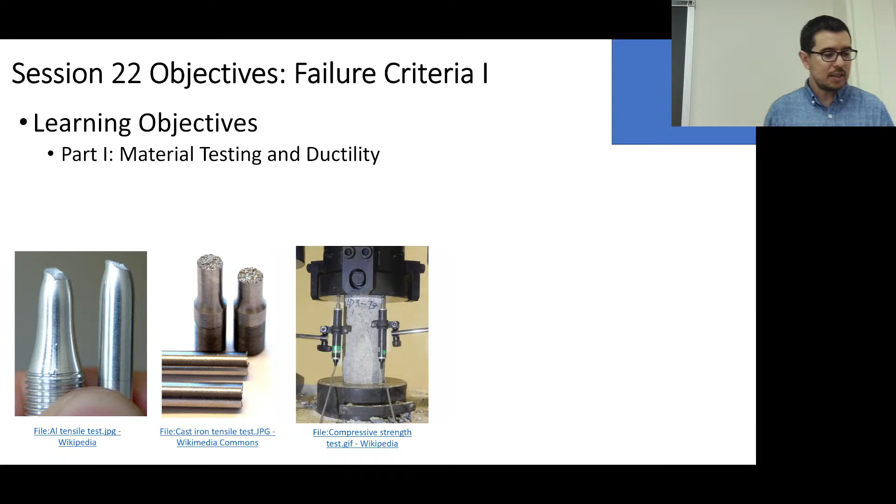So we're going to discuss material testing a little bit and ductility, and then we're going to talk about our first criterion, maximum normal stress for brittle materials, and then we'll talk about maximum shear stress for ductile materials.

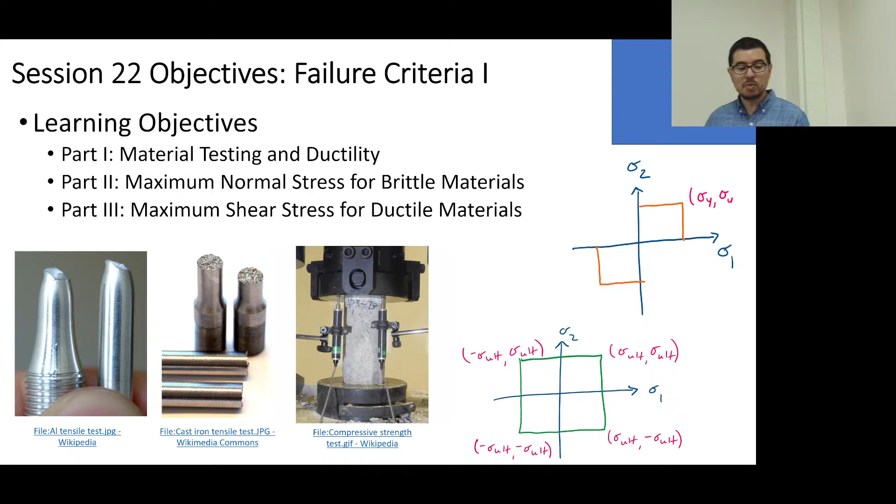In our case, I didn't really tell you how some of the samples are made. Maybe you care, maybe you don't, but we have wonderful design specialists in the department, and they have a die that they've made, and they can take sheets of aluminum and punch out those samples - that's how the aluminum ones were made. And then we have the paper samples - you made your own paper samples yesterday, hopefully that was a little bit fun.

The ones you tested to get the tensile strength, those we cut on a laser cutter ourselves. But you can do it - we've done it in the maker spaces, and we have a laser engraver in our lab too. So that's how we've created those samples for testing.

Something like this kind of sample, right, that has been turned on a lathe, okay, and those are more expensive to produce than the samples we're producing for our purposes.

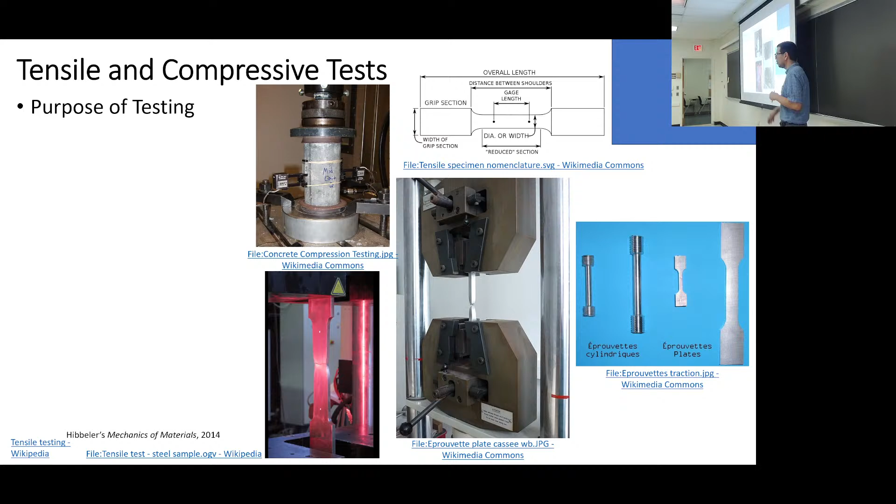The purpose of testing is to characterize the intrinsic properties of the material, so that we can take these intrinsic properties and then understand how they're going to affect the behavior in a structure.

Said this kind of prior, but to clarify, we have mechanical properties of structures. Mechanical properties of structures - those are the ones where we use the K, the stiffness, or the KT for the torsion. Those are mechanical properties. I have a spring constant, I have a spring rate.

Also, this is where the hot spot is. This is where the stress is going to be the highest. This is where the strain is going to be the highest. Those are going to be kind of mechanical properties.

Material properties are where I've digested everything down to an element, and I know what my elastic modulus is for this element. I know what its Poisson ratio is for this element, and I know how it's going to respond. Those are the material properties.

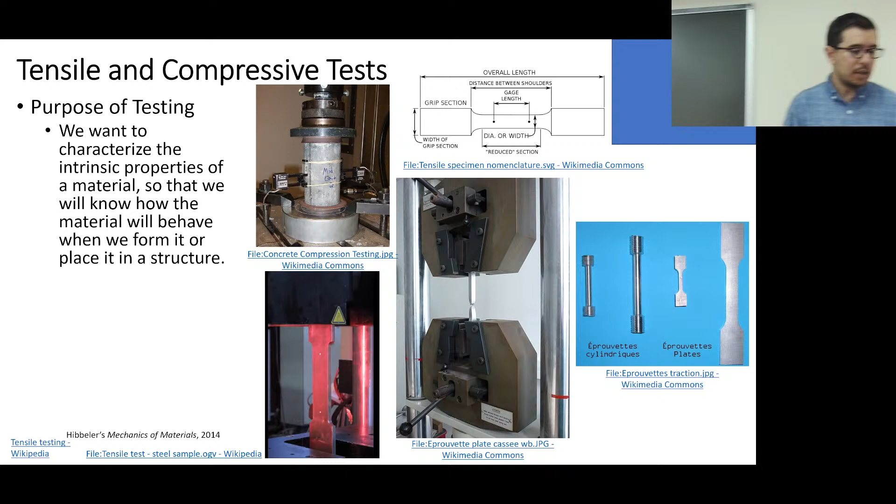So when someone talks about mechanical properties, typically they're talking about a structure. When they talk about material properties, they're saying this is the elastic modulus. Hopefully you don't mix them up, the mechanical versus material properties, but hopefully at this point this is kind of clear.

Tensile tests are not perfect. You saw it firsthand, right? You saw the noise. It's actually quite educational. You saw the noise in the sensor, like, is it 40 or is it 38? Is it 37 newtons? What's going on here?

Different material testers are going to be able to give you higher accuracy in the ranges you're interested in. If you're testing concrete pillars, you probably want fairly large load cells—physically large, handling kilonewtons of force. If you're testing biological samples, you're probably going to have smaller, higher precision load cells that can handle fractions of a newton. Or you get into atomic scale things, and you're talking piconewtons.

We kind of talked about this at the beginning of the class: you want to use the appropriate machine for the job at hand. You can get a machine that does very small, accurate readings, but that's really expensive—atomic level accuracy, like atomic force microscopy. You can get a material testing machine that does very high loads and is big, and that's also very expensive. So you want to find the machine that's appropriate for what you're doing.

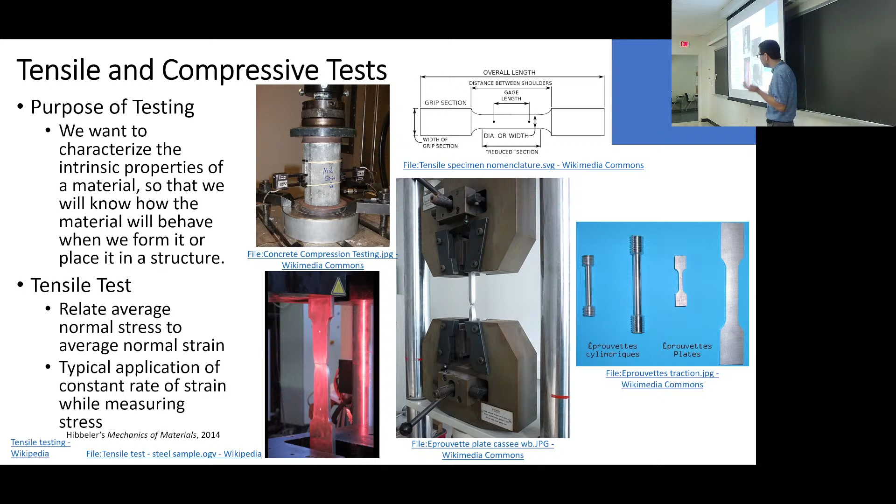The machines we have aren't tremendously expensive—you're hand cranking them. Thank you, Pasco. It's kind of fun to do a hand crank. It's probably the last time you'll hand crank a tensile test. Maybe some of you will never do a tensile test again—there'll be someone in the lab that does it for you. But hopefully some of you will do more tensile testing. Those machines are a few thousand dollars each, so they're not through the roof, but not super cheap either. Even though it has a hand crank, when I first saw them I was like, what's up? But you get a feel for it.

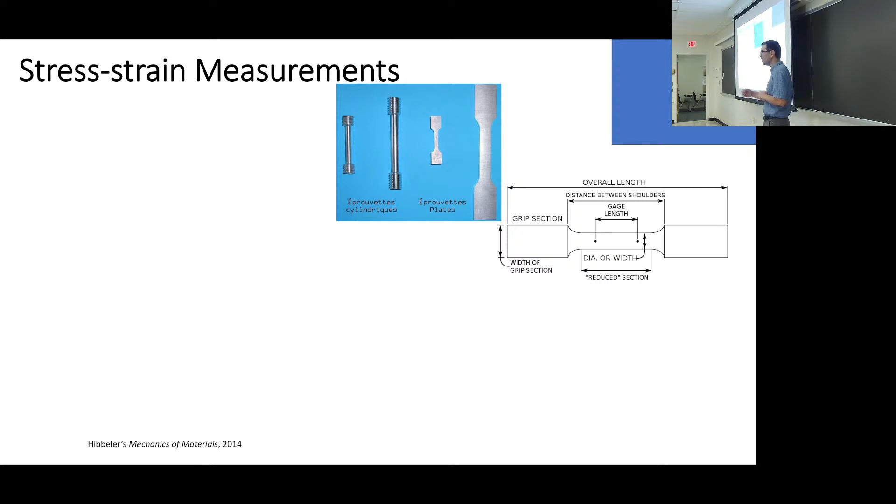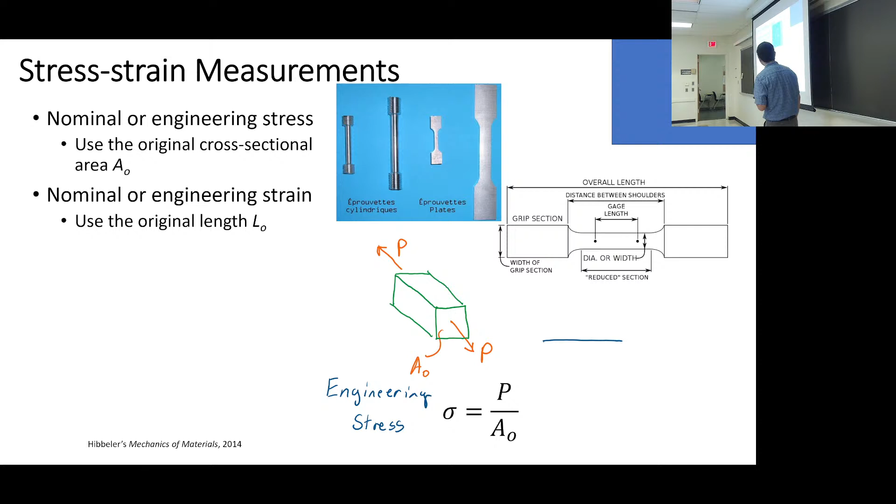The nominal or engineering stress is typically what we're interested in, and the engineering strain is also typically what we're interested in. If you work with elastomers, the rubbery materials, you start to get all kinds of confusion, because the properties aren't just an E sometimes. I can pick any range of any material where I can fit a line to it—if I pick a small enough window, it's going to be linear in that range. That's linear approximation, that's perturbation analysis, whatever you want to call it.

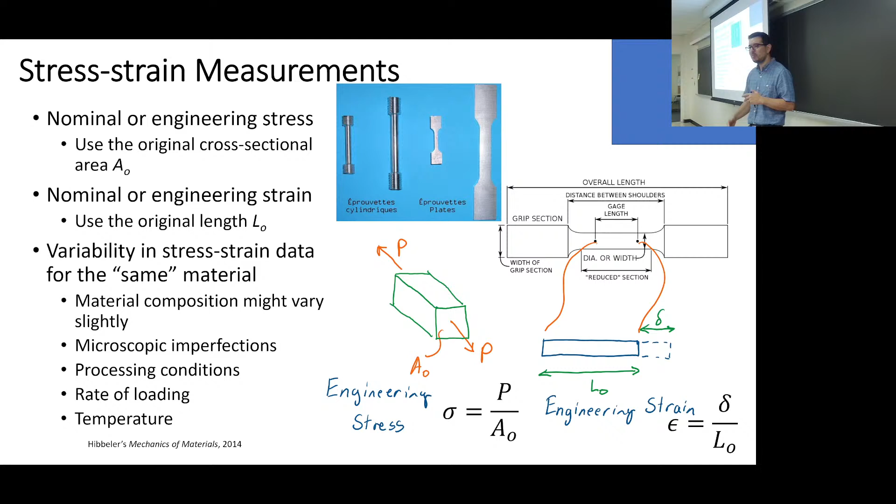But when you start stretching a material to its extent, it's going to potentially have issues with being quote linear. But in this world that we live in, which is 291, things are linear—even though they're not, like once it's in plasticity, but we don't care, because we developed those material models. We said, hey, linearly elastic, perfectly plastic, or linearly elastic strain hardening—linear plasticity type of model.

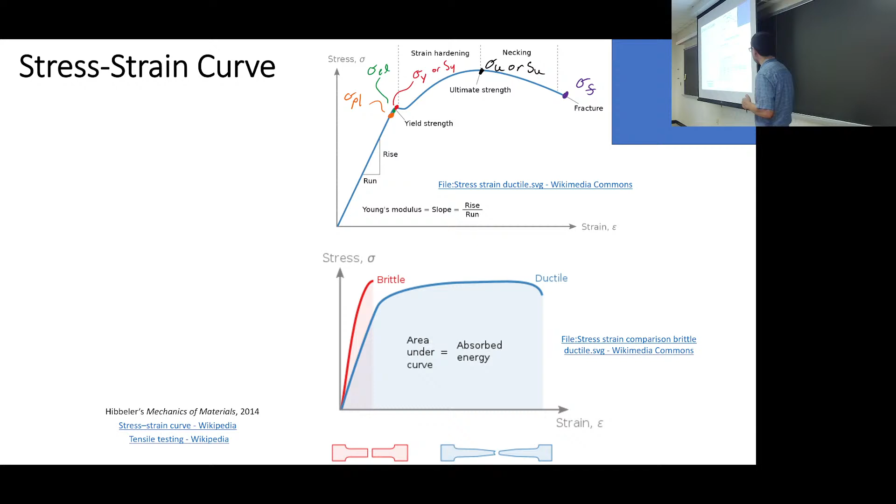We've talked about elastic behavior, we've talked about plastic behavior, and we've talked about yield and ultimate strength. So I wasn't super careful, but when you were doing those tensile tests yesterday or maybe two days ago, what were we really interested in? Were we interested in the yield strength or the ultimate tensile strength?

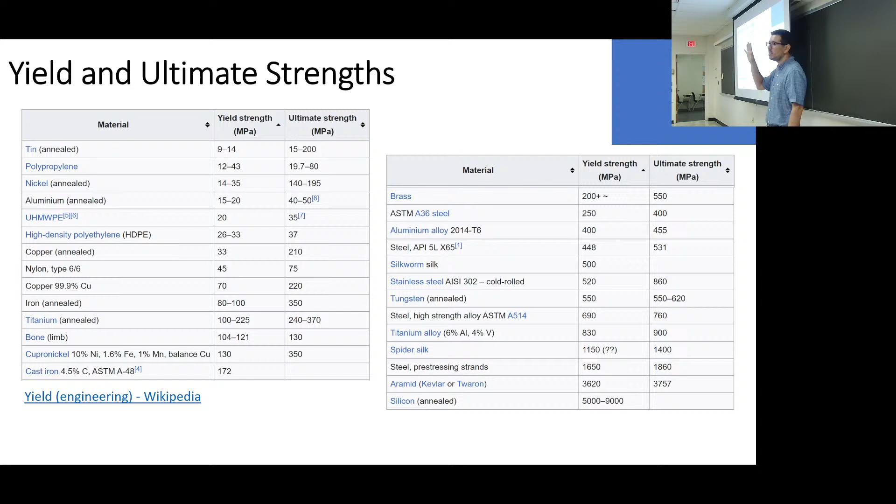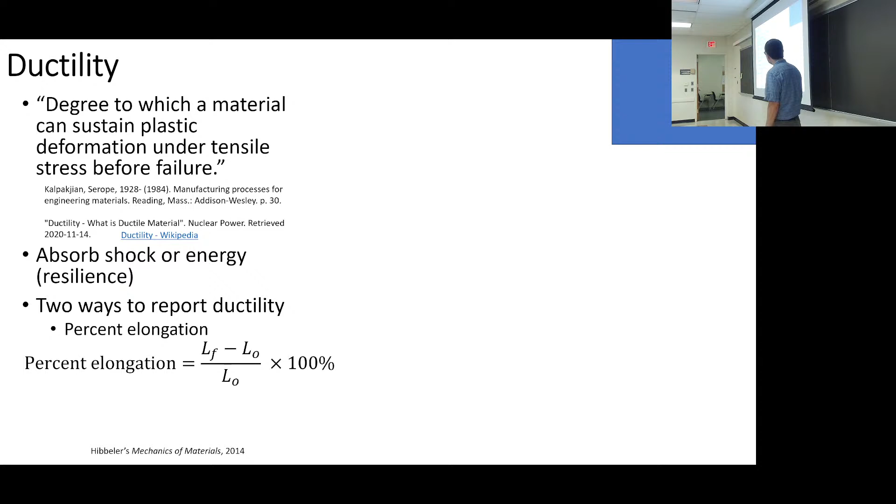For the paper samples, right, it's kind of a brittle material. You might have seen a little bit of flattening out, but it's just like, give me the ultimate tensile strength—that's what we're designing for. Okay, ductility—we said you could report it based on percent elongation or the percent reduction of area, and you have necking, and then brittle fracture looks like this.

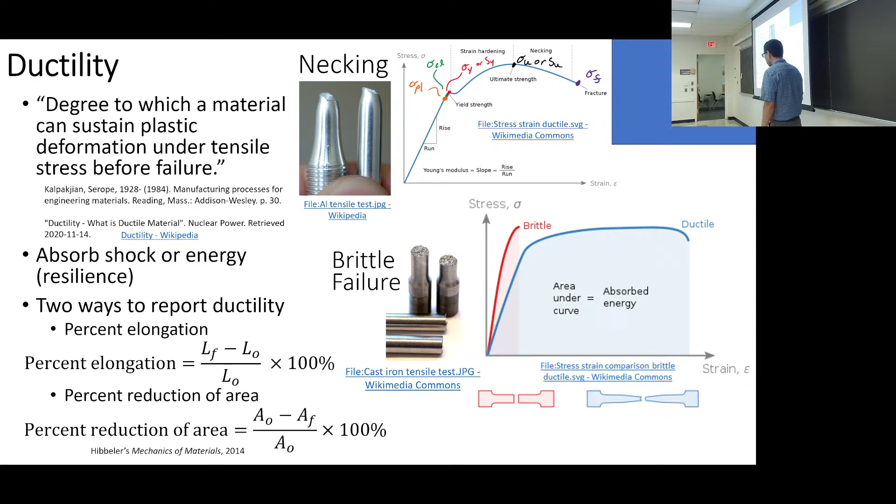Okay. When you study fatigue, you'll see it'll be fun. Well, maybe it won't be fun. If I'm teaching it, probably won't be fun.

But when you look at fatigue, you can actually figure out how something broke or why it broke, the mechanism for failure, just based on looking at the resulting surfaces of the broken part. For example, I was helping another guy with a consulting job, and he's like, we need to figure out if this bracket failed because of fatigue or just static loading. I didn't know what I was doing, but I had a bracket that had been repaired, so I had to grind down through some of the repair to figure out what the actual fracture surfaces looked like. Once I had done that, the pro looked at it instantly.

He said, 'Oh, okay, yeah, that was fatigue.' Because what can happen... I can't remember if it was brittle. I can't even remember, that's bad. But what happens with fatigue?

Well, if you have fatigue failure, imagine a crack, and imagine it's opening and closing over and over again, and the crack is propagating. What happens is you have this surface opening and closing, and it's hitting itself, and when it does that, it actually smooths it out. So it's opening and closing, crack propagating. If you have fatigue, like you're loading it, there's vibration, it's on a boat, the motor is running a lot, and this bracket is shaking, opening and closing.

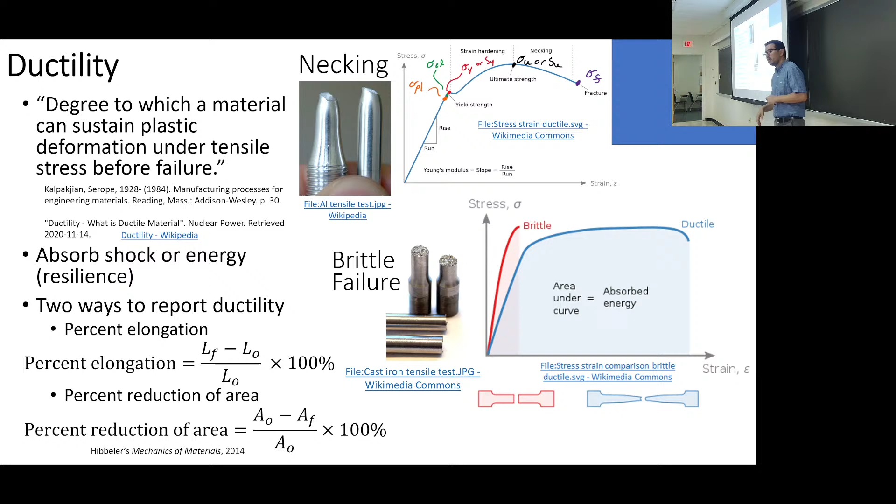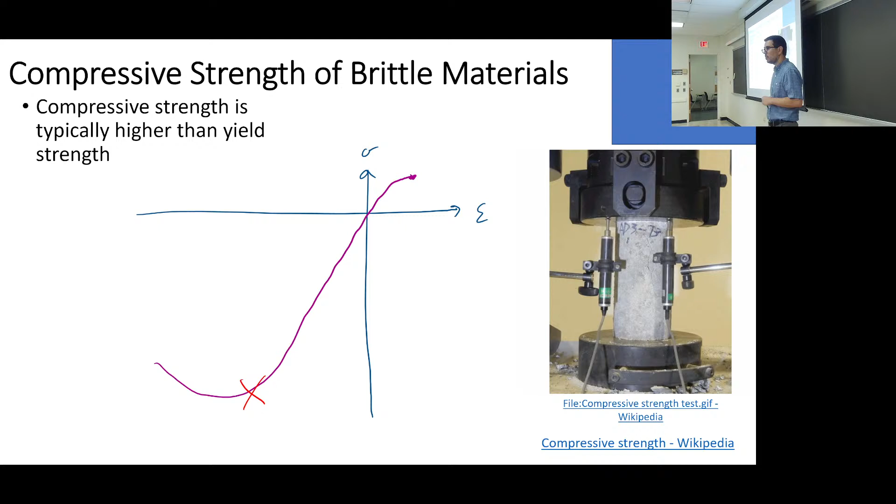Okay, so now, compressive strength of brittle materials is typically higher than yield strength. So what are we saying? We're saying, and it's kind of intuitive, that if you go this direction on the stress-strain curve - I've never been there before, because I never draw those.

But in quadrant 3, you could have a negative stress and a negative strain. And so, this may not be completely true, but essentially the magnitude of this value down here is going to be typically higher than the magnitude of that value up there. That's for a brittle material - brittle, not composite, well it could be composite, but a brittle material like concrete. And when it fails, it's catastrophic.

Typically. And what are some of your favorite brittle materials? Paper. Okay, well paper is not actually that brittle. It will look brittle in our tensile testing, but wood is, I mean it can be, it depends. What else?

Glass, right? So my glasses, some plastics like acrylics, they're pretty brittle. Gorilla Glass is really amazing actually, it can handle a lot of loading, but what happens when you exceed its ultimate strength? The whole thing is shattered, catastrophic. Like the Gorilla Glass on your phone, the cover thing. Anyways, yeah, it's pretty cool.

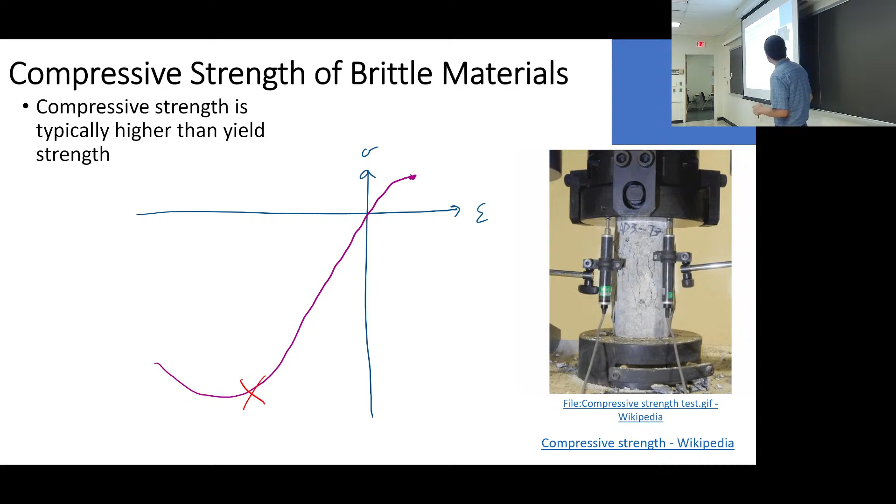Okay, so that's brittle failure. Now there are multiple theories, right, and there's not one theory that fits all. So what do we as engineers do? We create safety factors. We talked about that a little bit, we're going to formalize that a little bit today - no, formalize it more tomorrow.

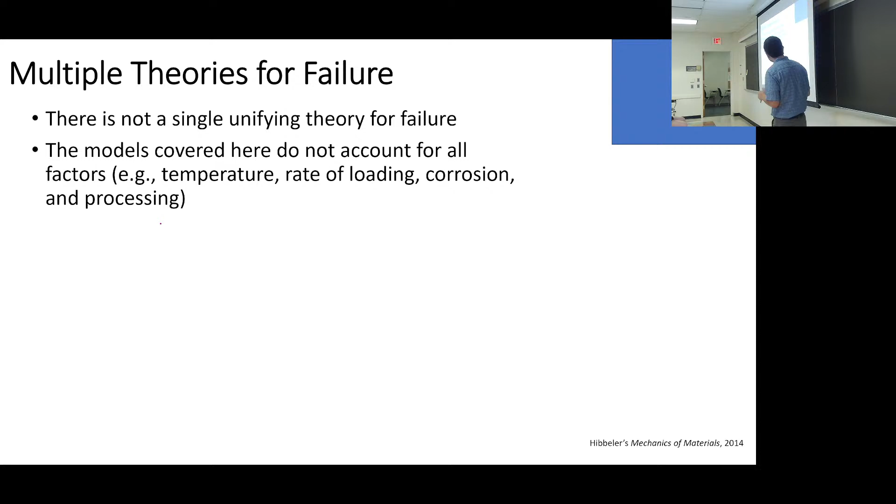But the brittle materials in particular are sensitive - these are not as forgiving as the ductile materials. And we're going to have two criteria that we use: the maximum normal stress, which we'll cover today, and the Mohr failure criterion, which we'll cover tomorrow.

Now, not all metals - so this is cast iron here - you don't just think that all steels and all metals are ductile. There are a number that do behave with brittle effects. When you take mechanical properties of materials, they'll cover that. We've talked about this, they can shatter, this kind of stuff.

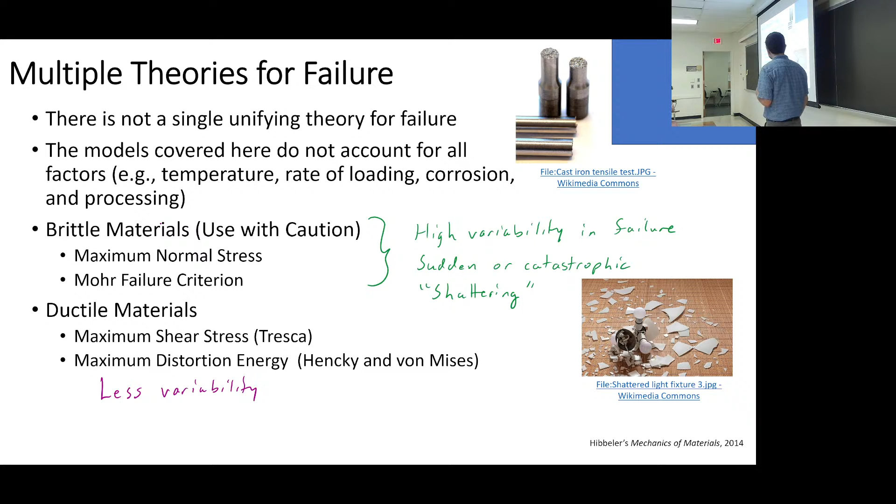Ductile materials - we'll think about maximum shear stress, and we'll think about maximum distortion, tomorrow. Maximum shear stress today. And there's less variability here. These theories of failure typically are pretty good at predicting what's going to happen.

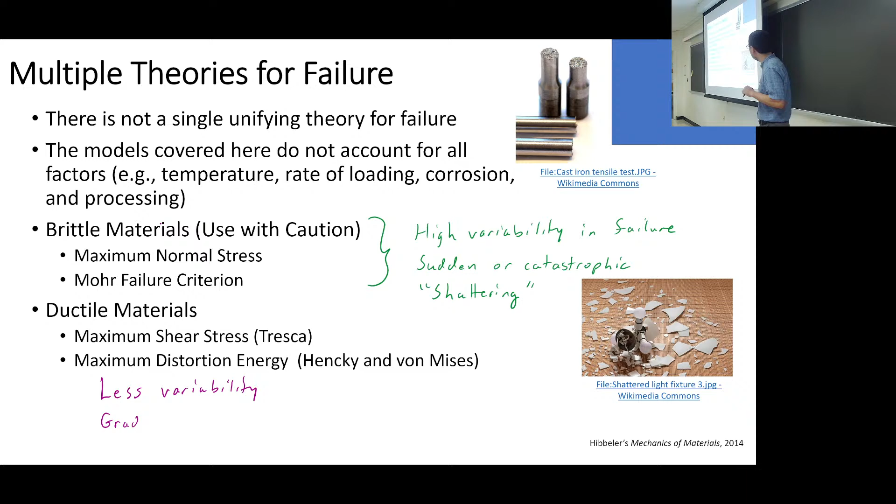All right, so which of the following materials are typically brittle and which are ductile? That will be a sorting exercise that you get to do. You might want to take a look at the internet and get some examples.

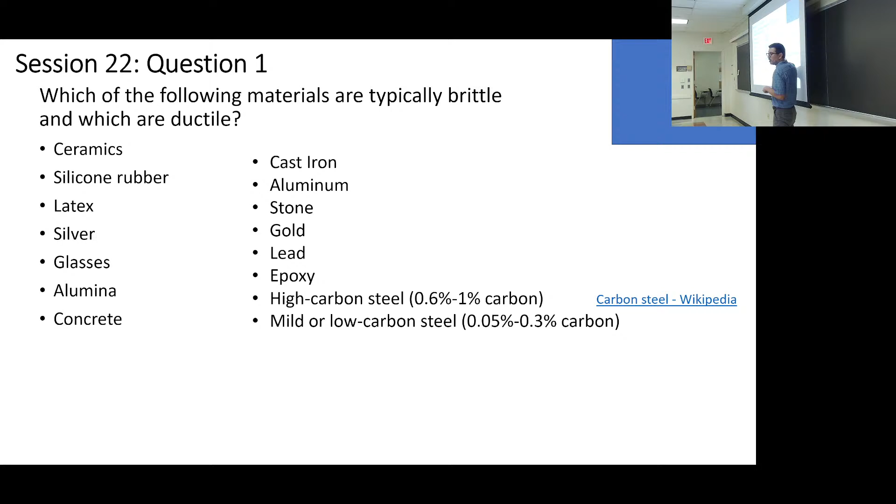Okay, so something about carbon affects whether materials are brittle or not. All right, so you get to do that.

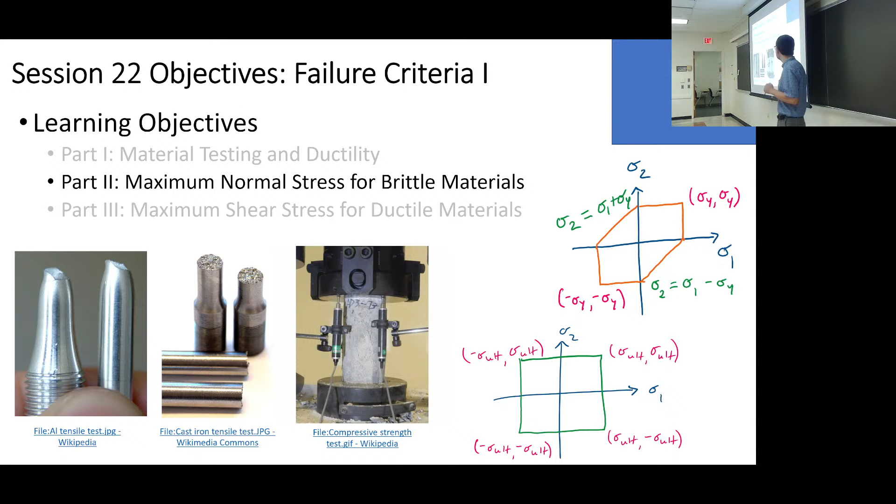Part 2. All right, maximum normal stress here. So, yes, the fracture plane, this is normal to the applied load, or the face of the fracture plane is normal to the direction of the applied load.

All right, this is a hint. It's a hint that if I load this material and then it fractures like this, when I have these two surfaces, this is a hint that the fracture is dependent on the normal stress. And that's what you have with brittle materials.

Normal stress, okay, quite frankly. And what is the maximum normal stress in the system? And how does it compare to the threshold that we set? Okay, it's a pretty simple idea.

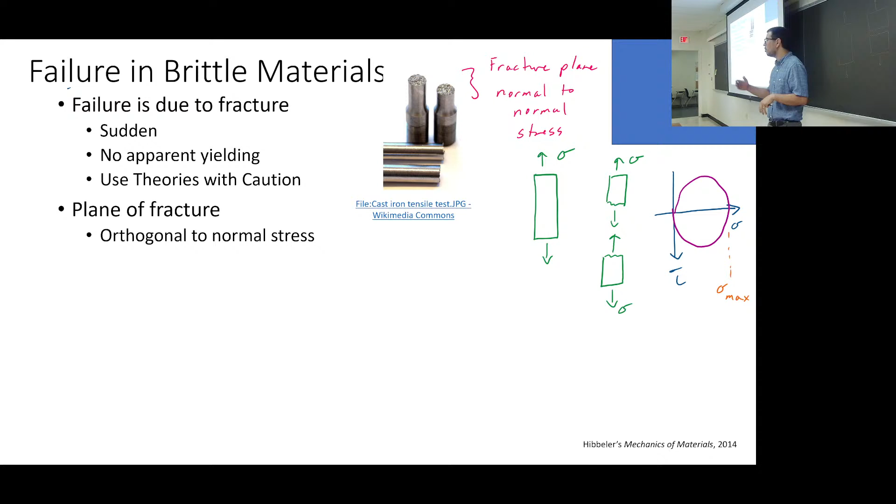Now, what if you have a material that's undergoing torsion instead, and it's pure shear? Well, I've got to figure out what that equivalent maximum normal stress is to be able to compare it to tensile testing data. Everything for our purposes comes back to tensile testing.

My fracture plane, my fracture line, is probably going to be—see this? I have a compressive stress and a tensile stress under pure shear. And like we said, the tensile stress is weaker. The tensile strength is usually weaker for brittle material than the compressive strength. So that means it's most likely going to fail along the plane where it's under tension.

And that's 45 degrees. Rotate 45 degrees from the plane that's oriented. So, guess what we're going to do?

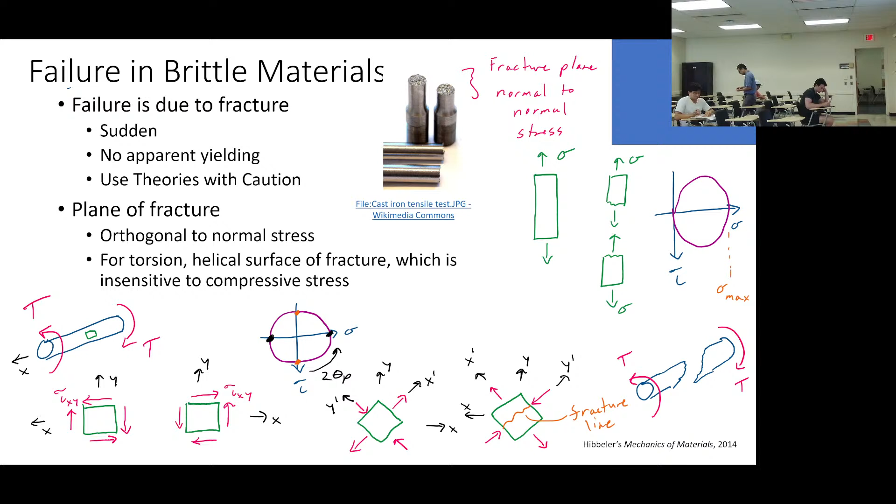I'll try to bring in more chalk tomorrow so that you guys can have some fun. Okay, this one's a little bit short. All right, so I got about half of you. Apologies, you didn't get a piece. I'll try to show it to you tomorrow. And the people who take care of this are going to be upset with me.

All right, so what did we just learn? We just learned that if I apply pure shear here, I care about what's happening at 45 degrees. So if I've got a plane, right, that I've drawn a nice little element on the top here, I care about something that's going to fracture at 45 degrees.

So what I want you to do is apply pure shear by twisting this piece of chalk, and we're going to look at the angle that results. Okay, now go ahead, look at that. See that? That's 45 degrees, more or less. 45 degrees, 45 degrees. So you guys get it?

Okay, now if I take another piece of chalk and I apply a bending stress, a bending moment to it, what should we see? Not 45 degrees—what should we see? It's a brittle material, right? So a brittle material is going to have just a clean cut right across.

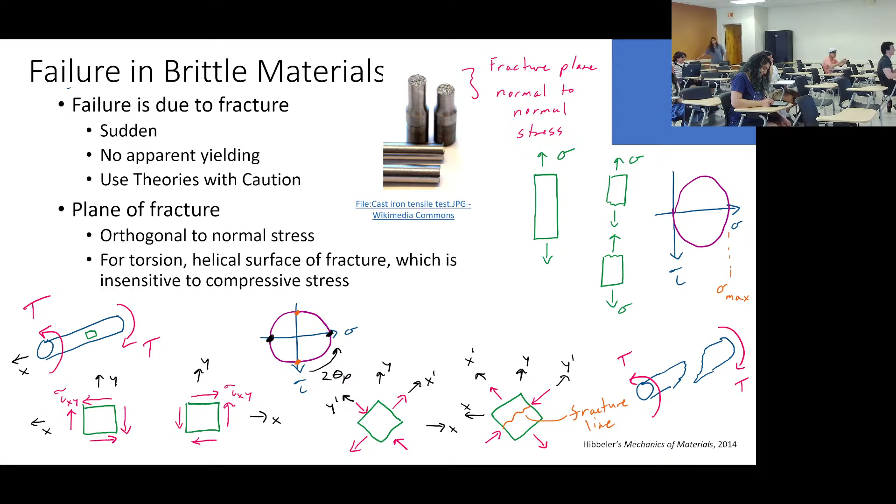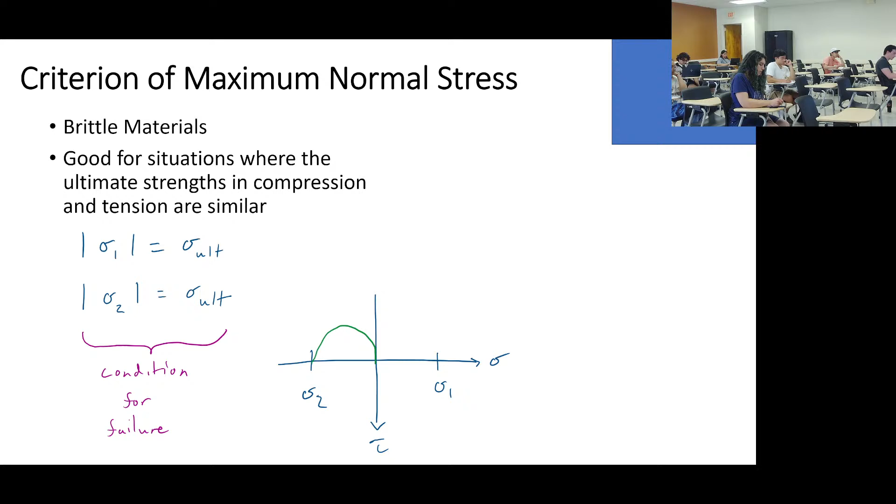All right, so what is the criterion? This is often good when the ultimate tensile strength and the compression strength are the same, which can happen. Tomorrow we'll show you the Mohr criterion, which is when they're not the same, but this is assuming that they are. And so if they are, here are the Mohr circles.

If I'm looking at it from a Mohr's circle perspective, I think of this as the field goal criterion. As long as I'm in between these two vertical lines on Mohr's circle, I can kick the field goal, I'm probably good. So this is the first criterion that we use, maximum normal stress.

Now, another way to write this out is on what's called a sigma 1, sigma 2 plot. This is not too counterintuitive, but maybe a little different than what we've been talking about. What we plot, or first our axes are, principal stresses, sigma 1 and sigma 2.

And we can look at different ratios of these principal stresses. But what we just said is that as long as we're in the field goal, as long as sigma 1 and sigma 2 are less than the sigma ultimate, or greater than on this side of the negative sigma ultimate, we're good. So where would we be safe? Where would we not have failure on the sigma 1, sigma 2 plot?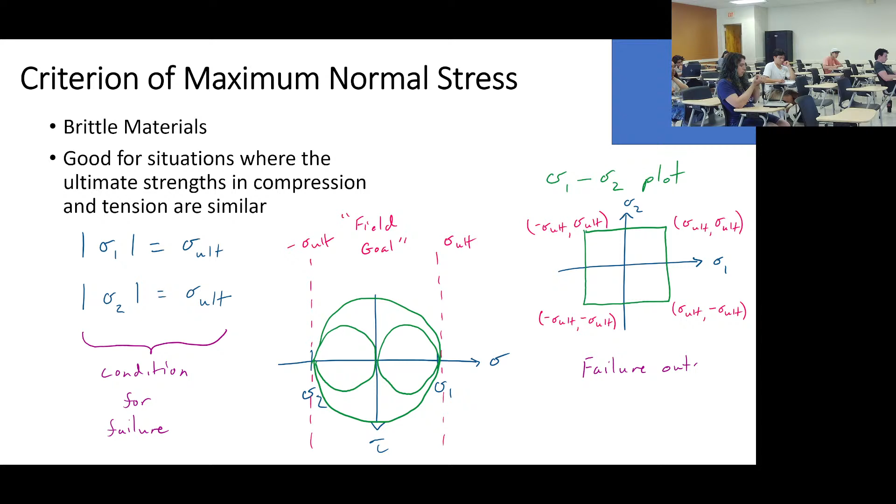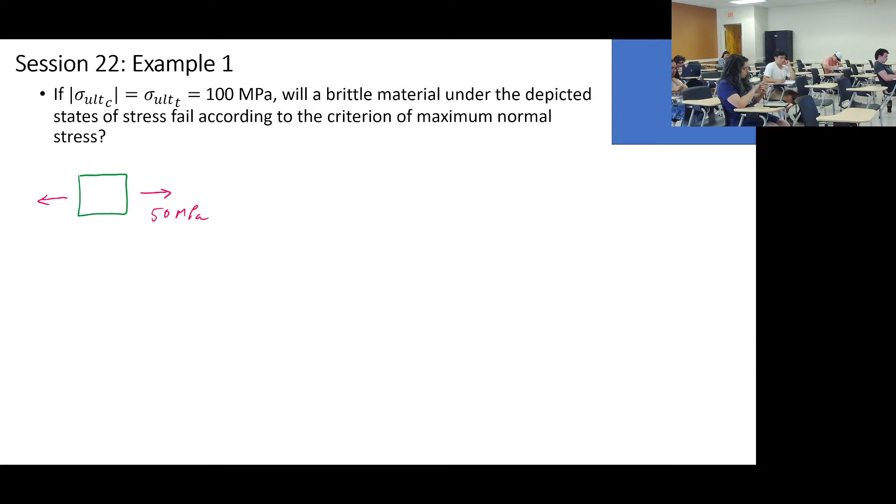So that's maximum normal stress theory. Failure would happen outside the box. Here we're saying that the ultimate compressive and ultimate tensile strength are the same.

If right here it's 50 megapascals, there's going to be no failure. Here I have a shear stress, I need to figure out what it looks like, a pure shear stress. If I go outside, which I do here, then I'm going to have failure.

On a sigma 1, sigma 2 plot, if I'm the equivalent, say I'm here, this is going to be sigma 1, this is going to be sigma 2. Where am I on this plot? Well, I have sigma 1 as positive 110, and I have sigma 2 as minus 110. So I'm going to be out here, and I'm outside that box.

And for this situation, where I've got a 90 and I've got 30 for tau shear stress, I have no sigma y. I can use Mohr's circle, and figure out what my radius is, and figure out what my principal stresses are, and I am just inside. So I'm going to be like over here. So barely no failure. Any questions on this?

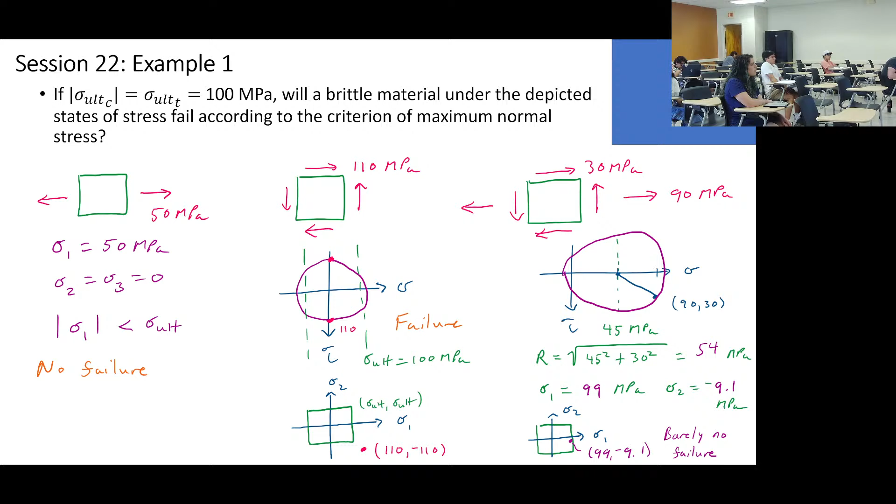Okay, all right, so that is normal stress. There's a question on how to do that. This is a pretty important thing. So let me just go through it quickly so you can do the work, because I don't want to bog you down. I've got a minute. All right, I'm just going to take a couple minutes here. You can watch the videos if you have further questions.

Fastest coverage of maximum shear stress theory you've ever seen. What are we saying? We're saying if the maximum shear stress for the material is above a critical threshold, it fails. This is for normal, and this is for many of the ductile materials, okay?

Remember in the tensile testing of the aluminum samples, some of what I showed yesterday at the end of class, I said, hey, look at these old tensile tests that we did on the aluminum. You look at the fracture, it was actually at 45 degrees, okay? Well, where do you have 45 degrees, right? When you rotate an element 45 degrees. So these are called Lüder lines, okay? I don't know the whole history here, but essentially you can see these bands forming at 45 degrees from normal, and that indicates that you have an issue with failing due to shear.

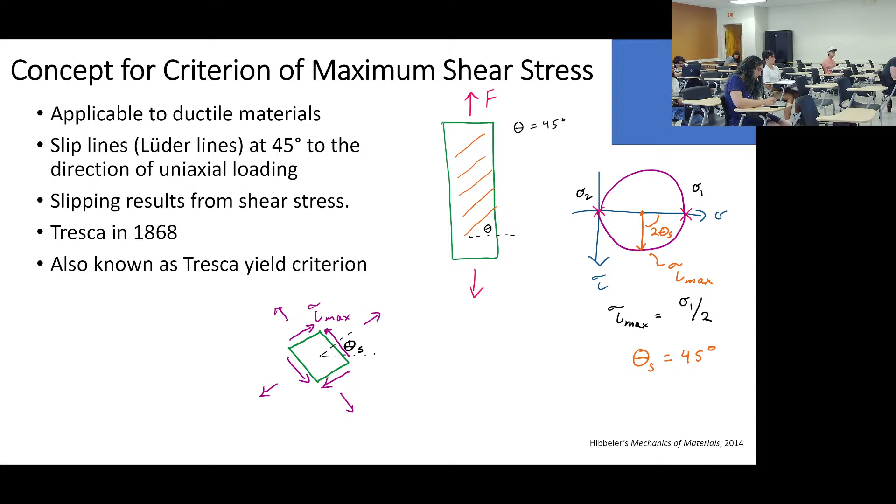So what does that mean? That means that before we had to be between the goalposts for ultimate, for the maximum normal stress theory. Here we got to stay within the car lanes, okay? So like you've got this one up here and this one up here or down here, right? And this down here is actually the positive, but we want to make sure that the maximum shear stress we're experiencing is underneath, or it's within this threshold. On a sigma 1, sigma 2 plot, it looks like this.

All right, so you can go through this quickly. You can watch the other videos that are already there, or you can watch whatever Jeff Hanson, whoever you want, talk about this, or read Hibbeler's book. How about that? There's a revolutionary concept.

So what you have is, it looks like in quadrant 1 and quadrant 3, it looks like what you have with maximum normal stress theory. But then start thinking about what's going on in quadrant 4 and quadrant 2, okay? And we begin to see that we've got to have a line that goes between these in order for us to stay safe, okay? And we should cover this maybe a little bit more next week, but there's also a line that's the pure shear line.

What's the pure shear line? The pure shear line is when sigma 1 is equal to minus sigma 2. Remember that? Because pure shear, we said we have one in tension and one in compression when we rotated by 45 degrees. So the pure shear line, how would you draw the pure shear line on this? Yeah, it goes from up here, from the upper left through the origin like that. That's the pure shear line.

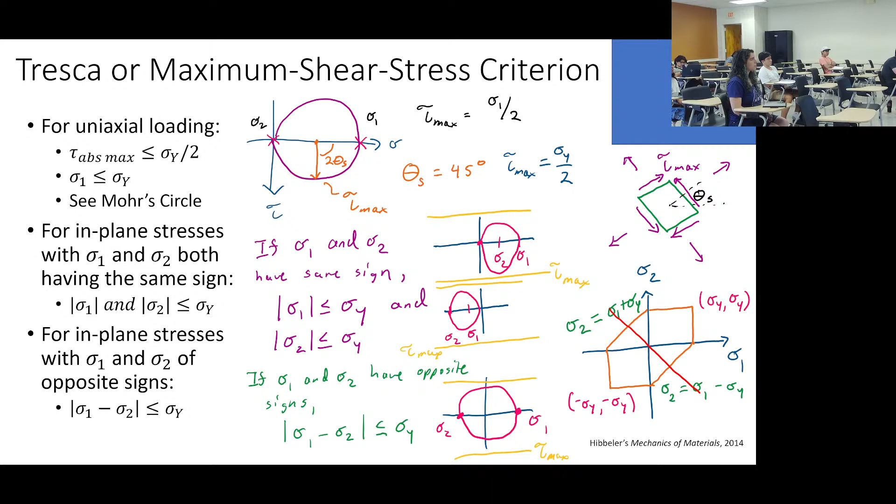Okay, so we'll talk about that some more. But here's another example, again, you're looking to see whether or not you're in the box or not, or whether or not you're in the lanes to see if you have failure. And here we are also outside the sigma 1, sigma 2 plot.

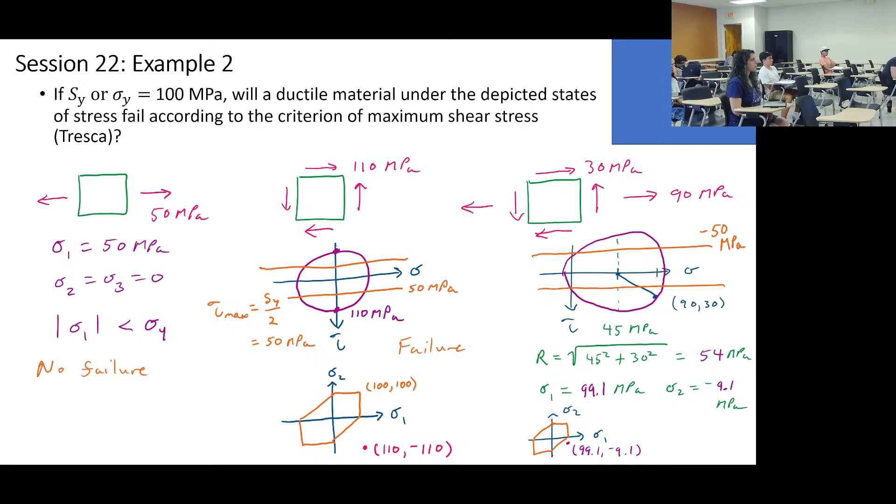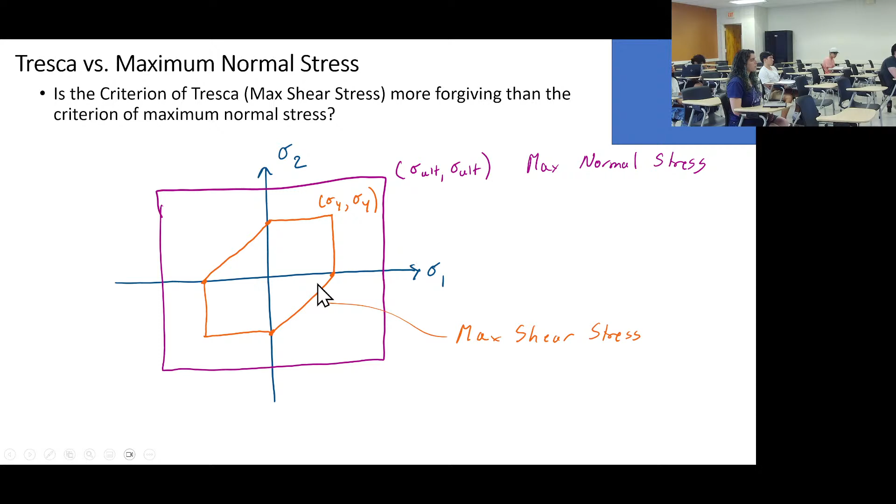All right, you can look at the maximum shear stress versus the maximum normal stress. Usually maximum normal stress is more forgiving. It covers a bigger area, not just because the ultimate strengths are often larger than the yield strengths, but also because it's like a box versus a diamond, okay? And then there'll be some more, and we'll have some more fun when we get back together on Monday.

Any questions? Okay, that wasn't quite a minute. That was like 4 minutes. All right, so that's probably the fastest I've ever done, and probably the most poorly taught as well.